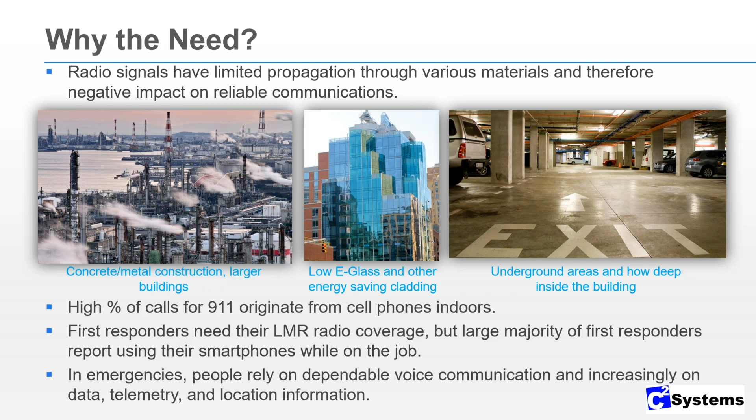So just to help paint the picture of the order of magnitude of this, I found these statistics. I thought they were somewhat interesting and helped give an order of magnitude. These are call statistics from the U.S. Department of Transportation back in 2017. They published statistics for 2015 and 2016 showing the number of 911 calls made via different methods: wireline, cellular, VoIP, text to 911, and how many happened within those two years.

I added the percentages on top so you can see the order of magnitude. Clearly, over 80% of these calls are now coming from cellular, and this was back in 2016 -- we're now in 2019, so I can't imagine how much more this has grown. So you can see a number of calls placed to 911 from cellular devices, and there's other statistics showing most phone calls from cell phones originate indoors. So again, these calls are being made from indoors, from cell phones, trying to reach out to get help.

There's also another statistic I didn't put on here, but I recently saw from the International Association of Fire Chiefs -- they did a survey back in 2017 asking, within the last 2 years, what percentage of time did you encounter a building with communication failures, and it was up to 56% over those 2 years. So again, it's a problem from both sides.

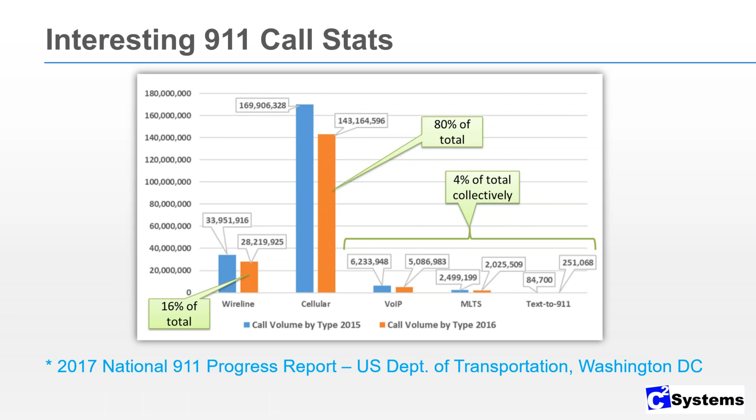So even though it's a similar problem, what I wanted to point out through this presentation is some of the differences between cellular and public safety. While it's the same problem and you're using similar equipment to solve it, and sometimes you can actually use the same DAS you're going to deploy, there are differences between the two, and it's good to understand those.

I'll run through some of these. At the top, the purpose of the cellular deployment is to meet the carrier's standards -- their signal strength, their signal quality measurements. Whereas on the public safety side, the same goal is to meet the codes that the AHJ has adopted for that municipality. So that's the difference.

Clearly, there's a technical difference in terms of frequency bands. On the cellular side, there are many bands that need to be covered for each license the carriers, the wireless operators, own -- 600, 700, the traditional cellular 850, PCS, AWS, it goes on and on. So there's a number of bands. On the public safety side, there's also a number of bands that need to be covered -- UHF, VHF, 700, 800, and I'm probably missing something. So there's a number of bands even on the public safety side, but the thing to point out is that they're different bands. They intermix.

There's some overlap between each of them, but they're different. The cellular side is more capacity and coverage driven. On the public safety side, it's coverage only driven. There's not really a need for capacity, typically, for public safety.

On this next slide, I wanted to go through what a typical deployment looks like, and while doing that, point out some of the differences between the two methodologies in terms of cellular deployment and public safety.

It all starts with defining the requirements—that's always the first step. Is the public safety system needed? Contact your AHJ, the fire police, and understand the requirements. Gather all the information needed: frequencies and channels to be covered, coverage goals, any existing systems or RF sources. Understand the other code requirements too, which dictate things like battery backups, enclosures, and coverage requirements. So you want to start by gathering all that information.

The next step is to potentially go on site, not only to test existing coverage from outside to verify you need a system indoors, but also to test and classify the building—setting up temporary transmitters and measuring wall losses within the facility you're designing, since each facility is different; a hospital is certainly different than a warehouse. If the building isn't existing yet, you do your best to simulate this using tools like iBwave, and then confirm with measurements once enough of the facility is built.

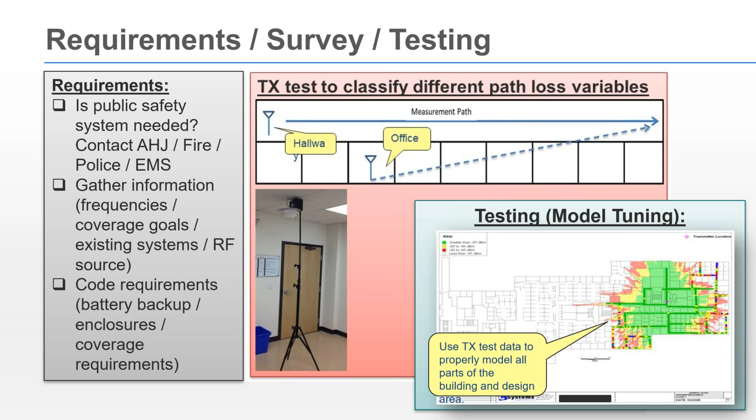In this slide, I wanted to illustrate the differences between a block diagram of public safety deployments versus cellular deployments, how they could be mixed together, and how that changes based on a small venue versus a large venue. At the top is your smaller system, and at the bottom is a larger system.

At the top, your systems are typically a BDA, or repeater—bi-directional amplifier. Typically in smaller systems, for cellular, we don't tend to deploy cellular BDAs anymore; that's more a requirement from the cellular companies now, since they tend to deploy small cells connected directly to high-speed internet access. In small systems, those are over-the-air fed repeaters.

On the public safety side, especially for VHF frequencies, if your transmit and receive frequencies have sufficient channel separation, you're looking at having separate transmit and receive. On the cellular side, you're not. But both of these systems are covered by BDA, typically in almost all cases separate BDAs.

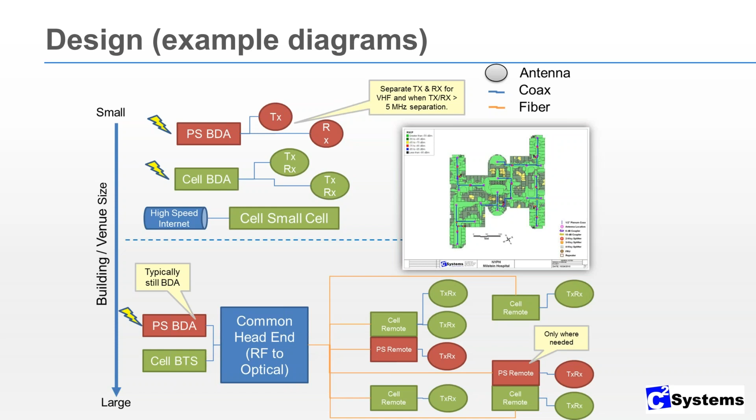On this next slide, what the engineers are doing as they're putting together this design is using the tool. This is actually an output from iBwave, where you're looking at all the gains and losses over the entire path from the system all the way down to the end user, and then also in the reverse direction in the uplink. So you have to take into account both the uplink and the downlink.

You use tools like iBwave to do that, and they have a great tool that helps someone - an integrator or designer, someone trained and certified - put together these designs, because it takes into account things like free space path loss, splitter and cable losses, and wall penetrations. It helps you look at interference, signal strength, and coverage areas. So you'd use this to calculate coverage from your amplifier all the way out to your antennas to make sure you're meeting the coverage requirements.

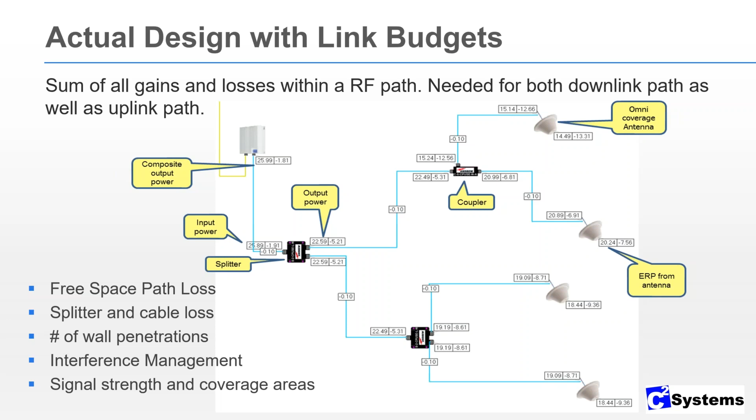So after you've done the design, the next part of the procedure is to look at install, commissioning, and testing. Again, you want to make sure you contact your AHJ to understand what the requirements are.

Most of it includes all installation to be done in NEMA 4. Other installation requirements likely include being a licensed electrical contractor, being certified by the AHJ or the state, and certainly being certified and factory trained for the BDA or for the equipment you're installing. So there are a number of installation requirements.

On the testing side, there are three testing phases. There's the initial system commissioning, where before you do the official grid test, or however the test is defined, you may want to look at it from just a spec point of view and look at just signal strength.

When you're doing the grid test, the acceptance testing, what you're typically using is a radio from the fire department or a like model, and you're measuring not only signal strength according to this grid test, but in most cases the requirements say you want to measure the DAQ level, and so you want to get a level of 3.4. They have ratings on the DAQ level based on audio and being able to understand the audio, so you'd be testing that in each one of these grids.

So the next step after you've commissioned, installed, and tested this system, you need to think about maintenance and monitoring. NFPA 1221 defines system monitoring requirements. NFPA isn't necessarily what all the municipalities have, so I always caution people to certainly understand NFPA 1221, but that's where most municipalities copy their code from, or they use it when developing their local code. It's always important for any new project to understand what the actual municipality has and what the AHJ is requiring. In most cases, what they're doing is copying it, or copying most of the substance, because it is actually good code.

Things you want to make sure are typically monitored: your AC power and loss of normal AC power, your active emitting devices like your BDA and repeater, low battery at 70%, battery charger fail, donor antenna fail, system component failure, and also the communication link between the device capturing those alerts, which is the annunciator panel where those lights show up, to the fire panel, to make sure that communication isn't broken. NFPA defines this, and most municipalities adopt it as is.

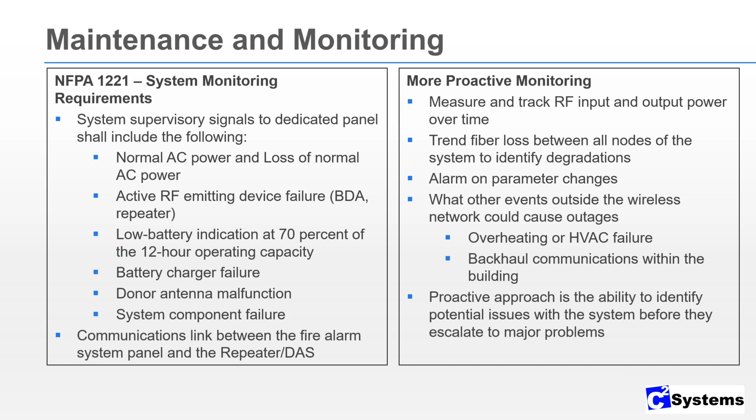So this is just a continuation of the last slide in terms of monitoring. You deploy these systems, and your options to ensure reliable service are: you can wait for customers, tenants, or employees to complain - in other words, you're not monitoring, you just wait for them to call and say this isn't working. You could walk the floors upon complaint to make sure you're compliant, and do that every now and again, but that's time consuming, though sometimes needed on an annual or quarterly basis. I think the real answer, from an efficiency and reliability standpoint, is to monitor things - monitor those RF levels, put probes in important locations to monitor user experience, and organize your information.

So just in summary, this is my last slide. Some of the lessons we've learned doing a number of these over the years: you want to work closely with your venue owners and AHJs to ensure you have the requirements and goals understood. Public safety and cellular DAS systems need to be treated separately—not necessarily physically, because sometimes it makes sense to combine them, but you want to understand the requirements and differences between the two, and the motivation behind both.

Design the system with maintenance in mind. What I mean is, when you design a system, make sure you're putting equipment in places where you can get to it and maintain it. So if you need to reach a remote amplifier, don't put it somewhere hard to get to. Test the system with proper equipment to make sure everything's working correctly. Proactive monitoring is another key piece, where you may want to go above and beyond the minimum requirements.

The last thing I had here—I'm a big fan of Clay Christensen, the famous Harvard Business School professor, and his jobs-to-be-done framework. It's basically understanding that it's not just 'hey, I need a public safety system or I need a cellular system.' It's really understanding what the real job to be done is. For these types of systems, the job to be done is that people want to communicate effectively and reliably for all stakeholders in emergency situations. It may be more than one of those pieces than the other, and you want to make sure when you're looking at these deployments that you're considering the entire job to be done. I think that's all I had.

So today's agenda: I wanted to talk a little bit about the solutions we have for public safety, and then dig a little deeper. We talked about NFPA and IFC standards, so I'll cover a bit of the RF part and how you would use our solution to analyze that.

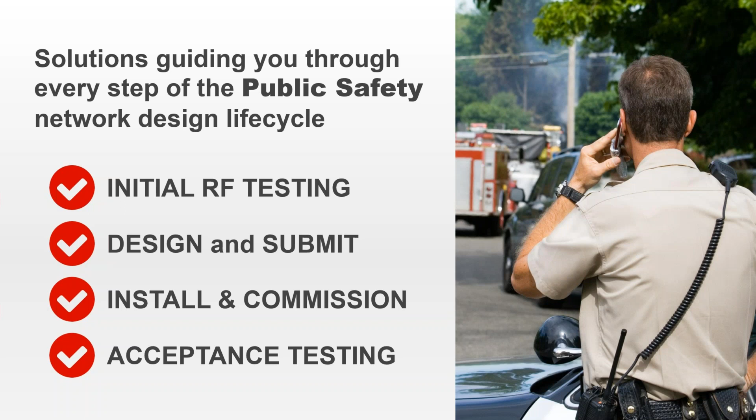So now I'll go into what we offer in our solution. We're known for generating heat maps, but the reality is, especially today when awful events remind us of the importance of good in-building coverage, we have a whole set of solutions to help with the full life cycle—from initial RF testing, like Scott mentioned, to detailed design, submittal, installation and commissioning, and finally acceptance testing. So what I wanted to do real quick is talk about the different solutions we have to help out across that full life cycle.

We have different modules for that. It comes with a prediction module, a propagation module, optimization, and collection. The other thing I wanted to mention is we do have a different flavor of this called iBwave Design Lite, which is not as heavy as our enterprise version, but is a good starting point for somebody that wants to get started with our solution.

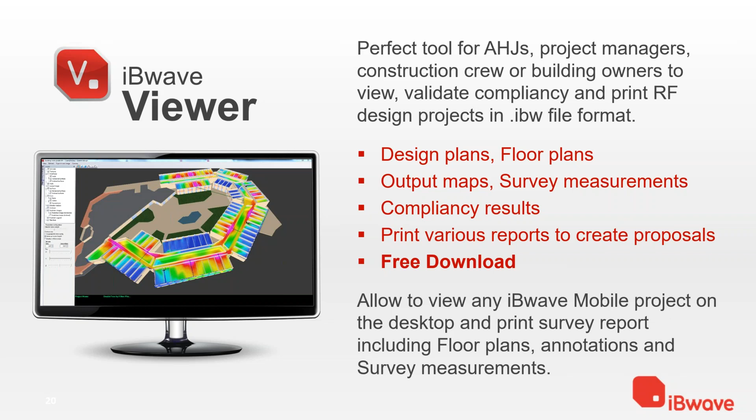Okay, the next thing I wanted to cover was a little bit of the RF guidelines. Usually when we're doing any kind of design, we reference NFPA or IFC standards. In there, you'll find different types of information, such as things for battery backup, etc.

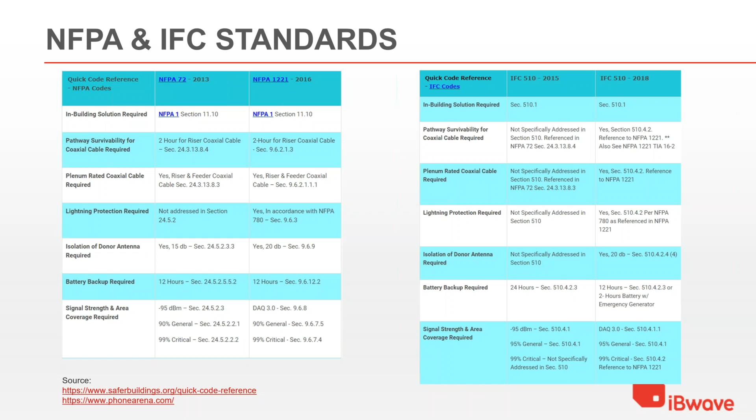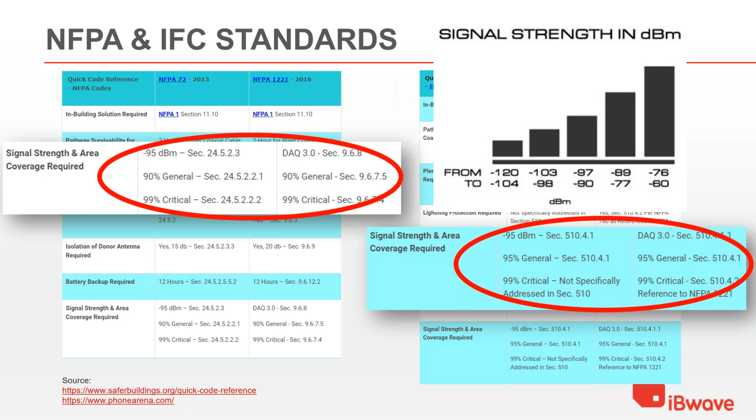Now that we have a good reference, the other thing I wanted to cover is how you see this in our software. So I'm going to go ahead and open up our software real quick. Obviously, Scott mentioned we have a training certification - I know a lot of the folks at C2 have that available. But what we do, obviously, when we're doing any kind of in-building design, the first thing we're going to use is import some kind of floor plan.

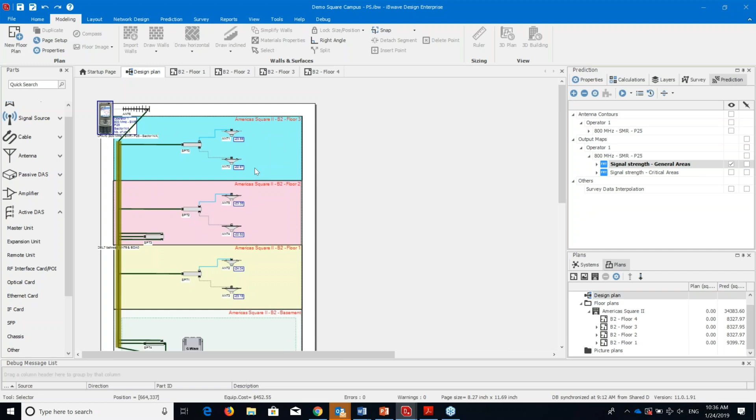So I used the software to generate a quick, simple BDA design. This is our design plan - this is the view that Scott was mentioning earlier. So we could see real quick, the donor antenna and the feed into each of the additional floors. I did something really simple here. What I wanted to highlight a little bit is on the compliancy. So we mentioned -95 and 95% of the general areas.

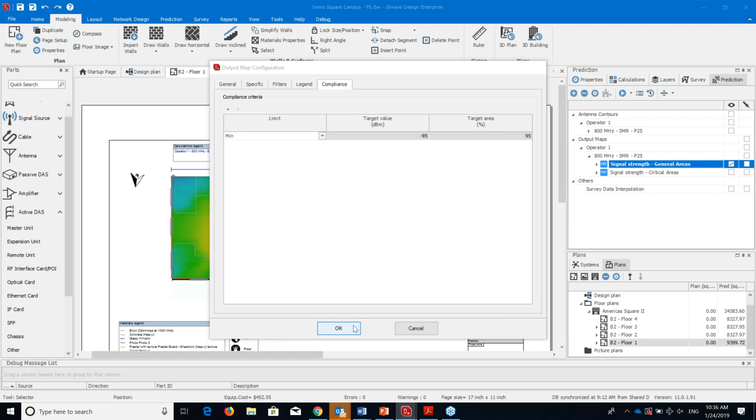And the good thing about our software is we could create different heat maps. When we're creating the heat maps, we have an option of entering this compliancy, right? So if you see here, I entered that -95 value in 95% of our area. Really quickly, when I generate this heat map, if I zoom in a little bit so we could see it better, you'll see that in the legend it'll tell us whether we're achieving this metric or not. We could also turn on legends to see, for example, material. And I just generated a quick heat map on signal strength.

If I recall correctly, John, in one of the meetings you had, there were people asking, well, we want to see bleed through outside of the building. So there are other predictions that we could generate. I just wanted to focus this presentation on signal strength. But as you could see, not only do we get a quick view on this, but we could also view all of this in 3D.

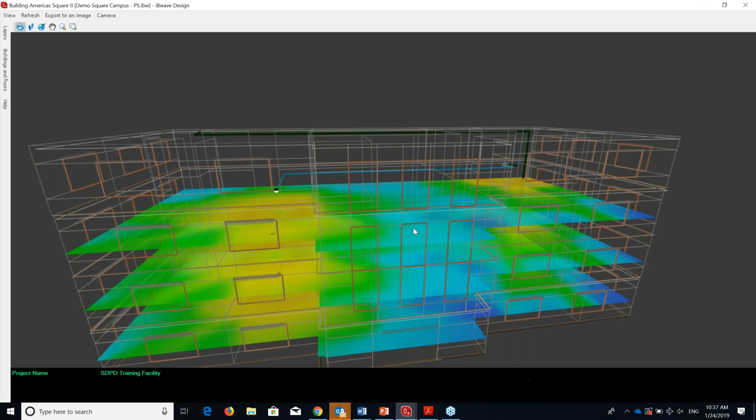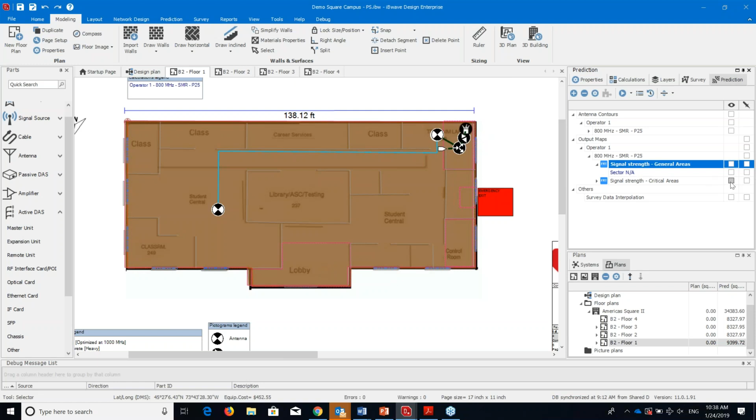It gives good visibility into that, and the software, for example, will take the losses between floors into consideration. The other thing I did on my design here is that if I go ahead and turn this off, I identified a couple of critical areas, right? So I identified my emergency exit, I identified this control room as something important. Obviously this area where I have my equipment and the lobby area. And what we could do is also generate a heat map for that area and view it in 3D if we want.

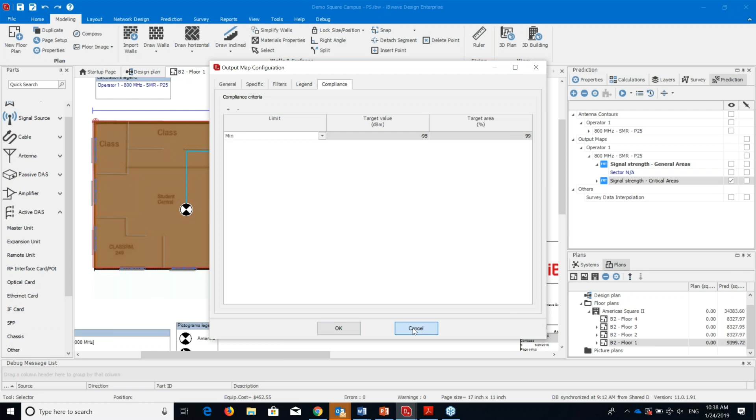And as you could see for this critical area, if we look at the legend, we could see really quickly, well, here we could enter that compliance value. So here we enter that -95. In the critical areas, we want 99% coverage. And we're easily able to see it in the software. So the software is useful to help with that.

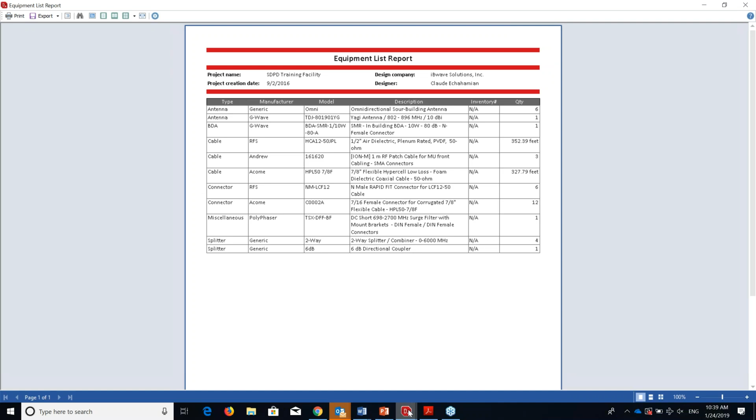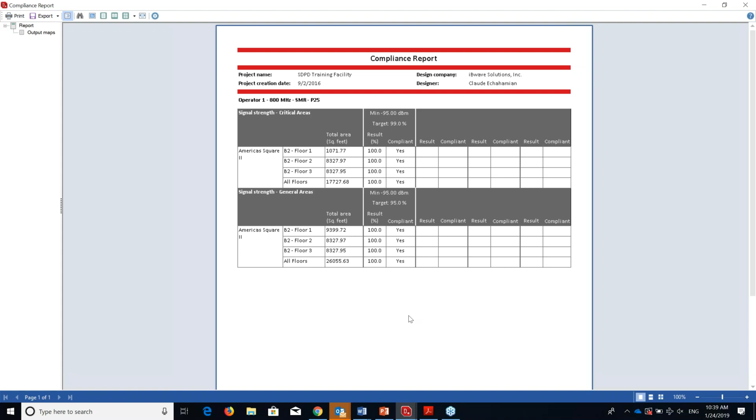So it's very simple on my end, like I said. The key takeaways that I wanted to say for my part here is that, obviously especially with the events, having in-building coverage is critical for public safety and very important. I often get surprised when people are making important decisions based on a PDF, right? So it's very important that you use the tools that are out there to help you validate that you are meeting NFPA and IFC requirements.